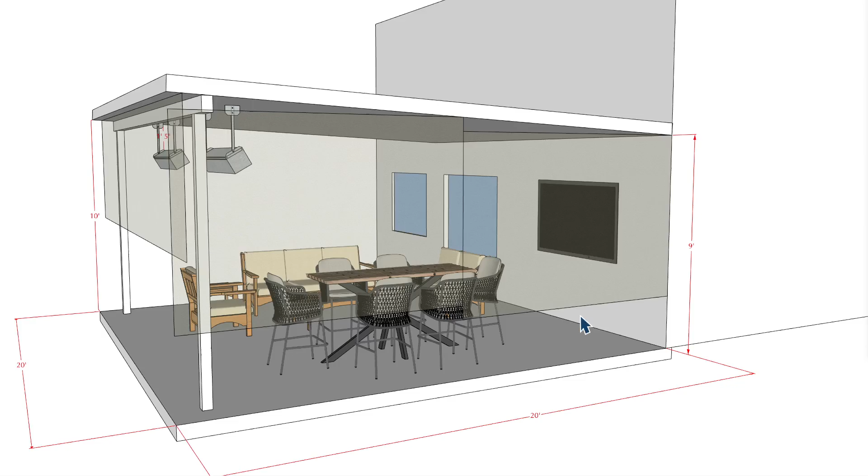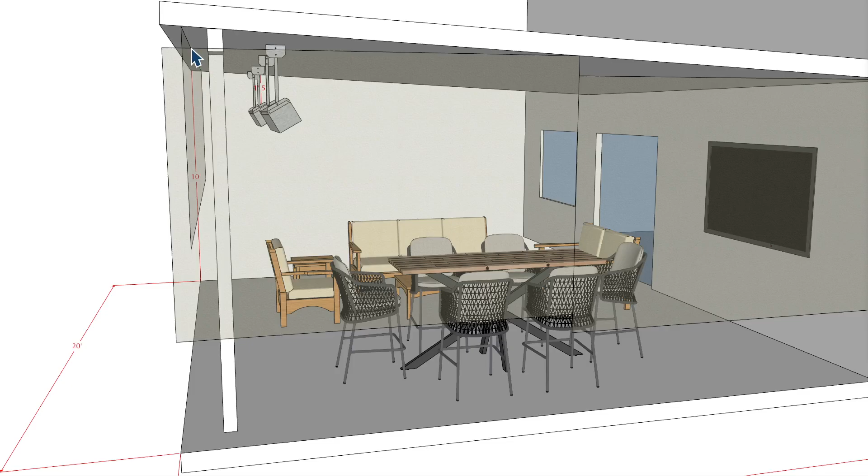This isn't going to be direct or specific, but it's going to be very close, I think, to what the information is that we received. I have this center beam here going across, about 12 inches in from this edge here to here, and I have a 4 inch by 4 inch beam or post holding that beam across.

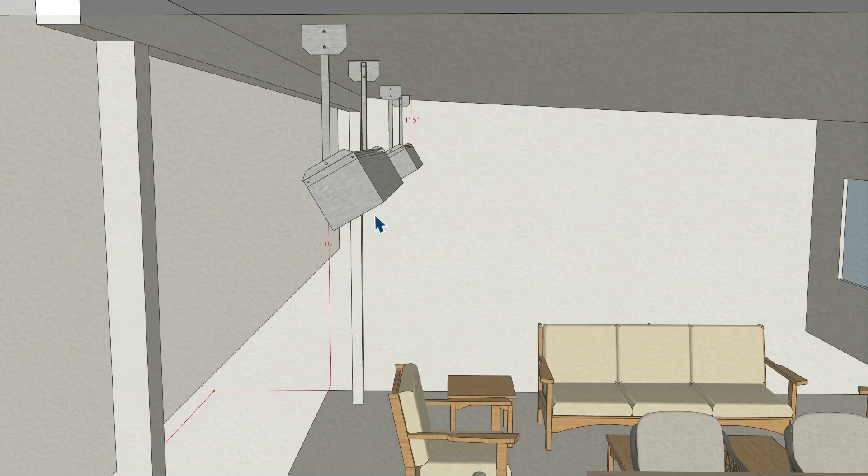Then I brought the heater in at 3 foot from this outer edge to, I think, the actual point right here, and I have it at 30 degrees. The heater, when at 30 degrees on a TSH, requires the angle to be no more than 30 degrees, as well as a clearance height of 17 inches here.

So that's one thing to be concerned about, or consider at least, when you make this decision on placement. I have a table and then some sofa and seating area like that, and I do have some shades here, drop down shades.

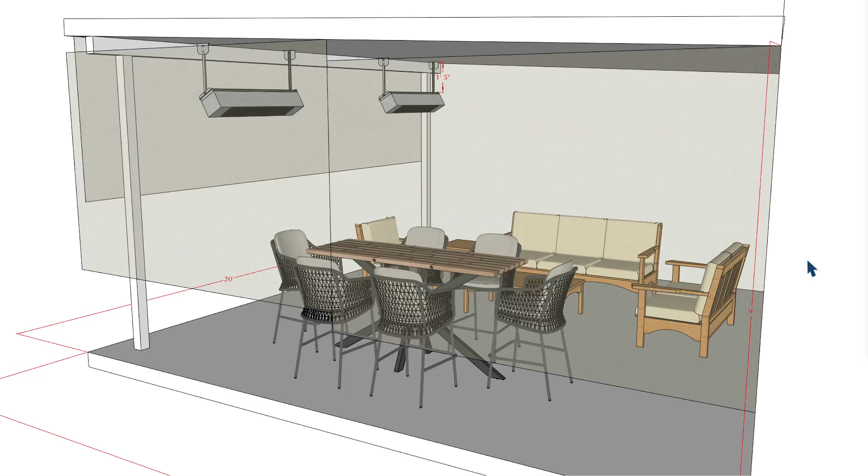Let's go ahead and look at the footprint of heat on these heaters. You can see that we're really going to cover this position here. The one position over here that I have, I'm not quite sure again of the true setup here, and then half of this sofa area here decently.

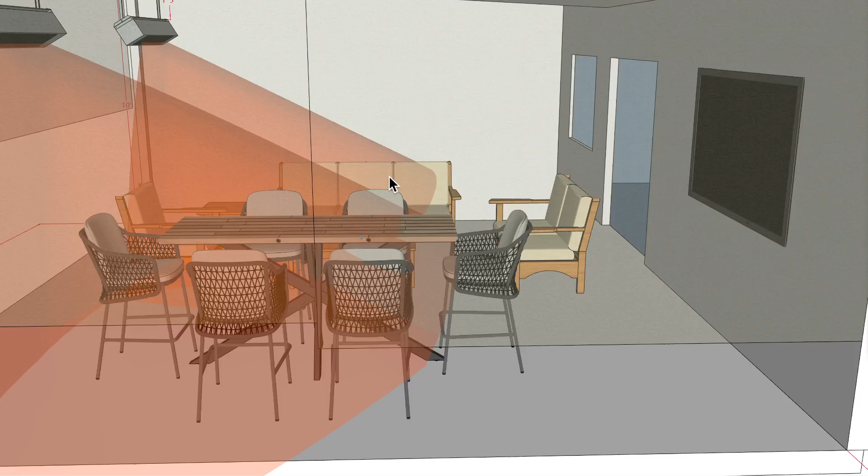And then you had mentioned something about the wife not liking the heater visually. I'm going to turn off the ray, because you don't visually see the ray, but this is how you would see the patio heaters out of the window, looking this direction here as well.

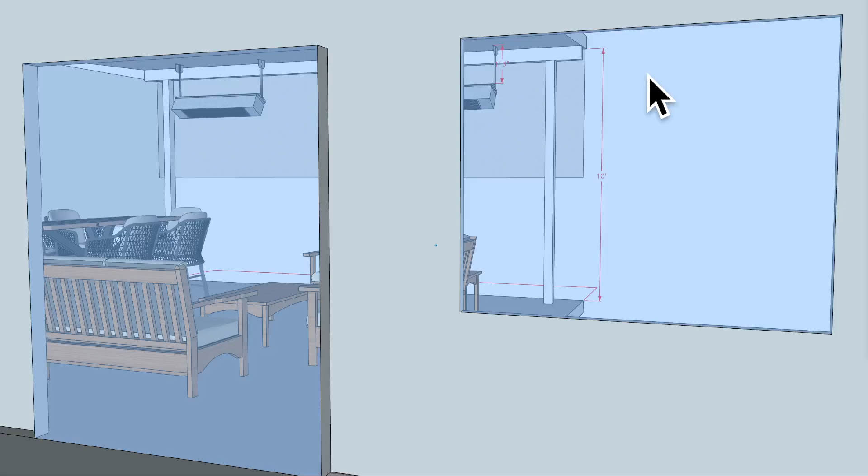See if I can go back in there. I'm not quite sure if this is where the window is going to be or the door, but I would imagine there's going to be a viewpoint, something like this is what you're going to see.

Yeah, I think that's about it. Would I do this application? No, I would do something like this here, really.

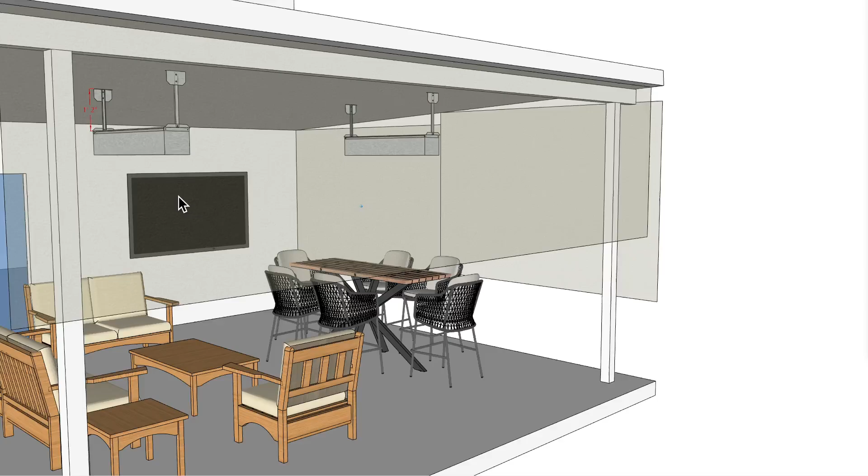Now this would put a better heat source on. And by the way, I have this at kind of like a bar height. It should really not be a bar height, unless it is. That's something to be concerned about.

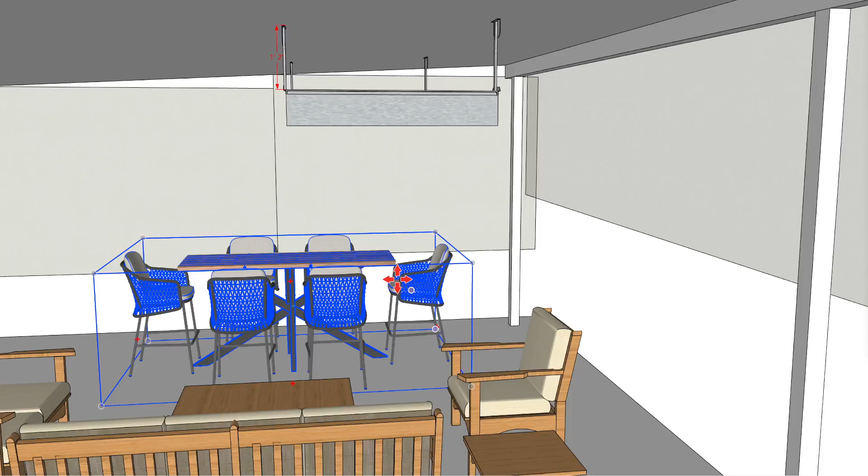Let's just move this down so it kind of has that same height as a normal seating position. So that would be more something like this here.

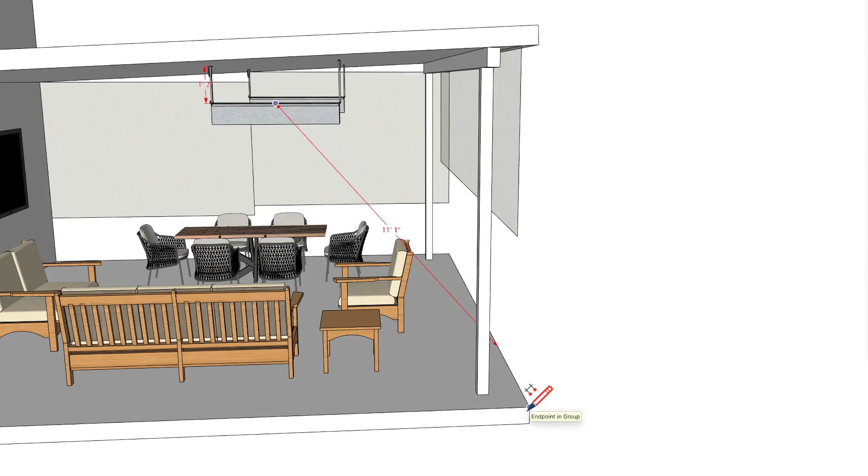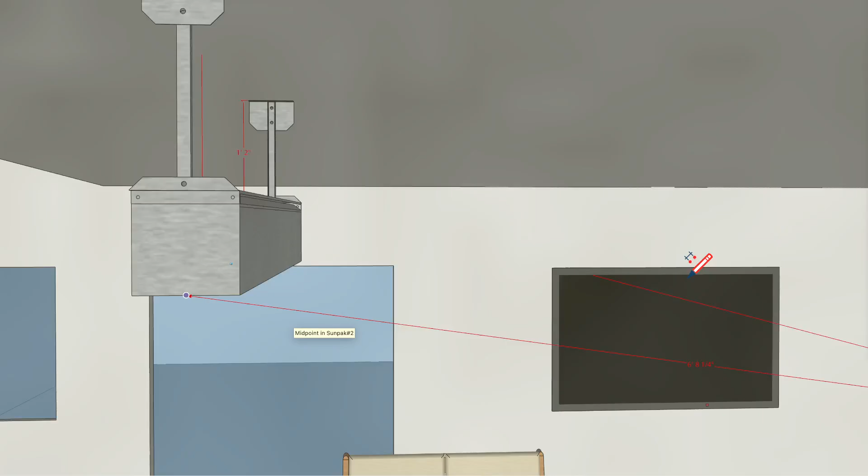But I have these heaters now moved in approximately, I think, 5 feet from this outer edge here. Okay, 7 feet 3 inches from the outer edge, and I have them at a distance apart from each other. That distance, from here to here, is 9 foot center to center.

Now let's go ahead and look at the footprint of heat on this. So now you can see that we're getting a little bit better coverage for this outer space here.

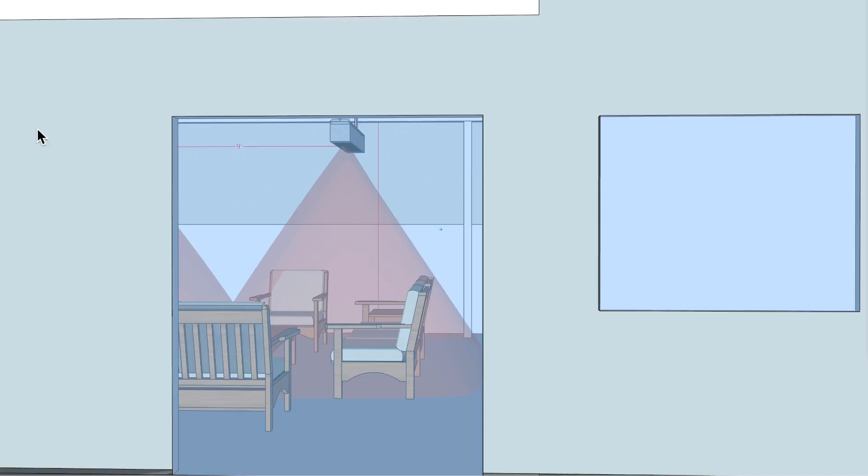And looking outside, do you see the same longer units as you did on the other? I don't think so—you're not going to see the ray again, like I said before. So this is a smaller visual from looking out into the patio versus this one over here, which is a little bit wider. This is 4 foot wide, and you see a little bit more detail on that.

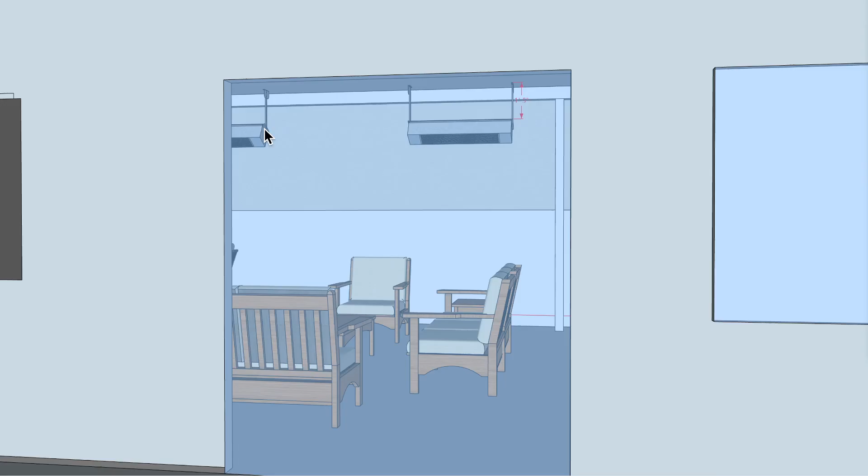But in any case, I like the footprint of heat better for this. And when you take the heater and mount it in this direction here, pointing it straight down to the ground, then the heater requires 14 inches of minimum clearance. So that's why I like this a little bit better.

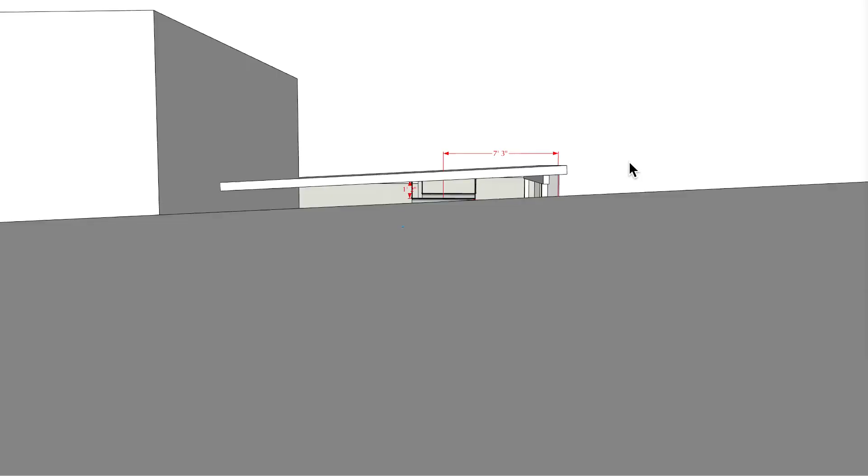Kind of seeing both of these now, and again, the footprint of heat, kind of getting an idea of what that would look like. And we probably should move this down here like I did the other one, so it looks semi together there. There we go.

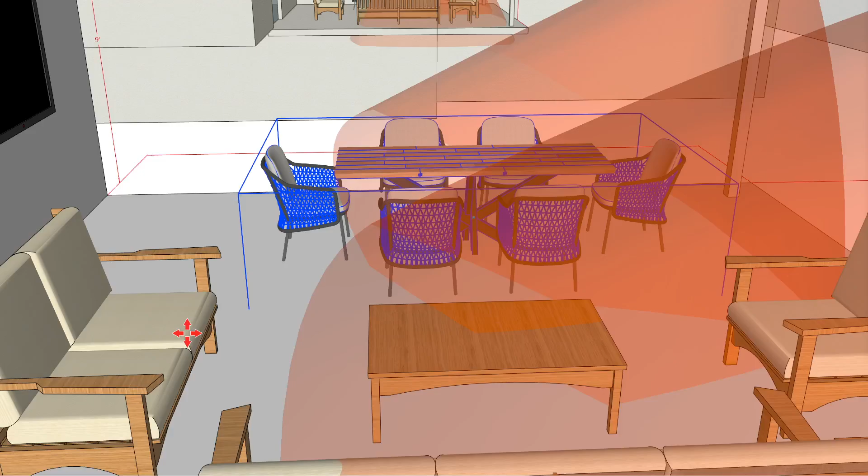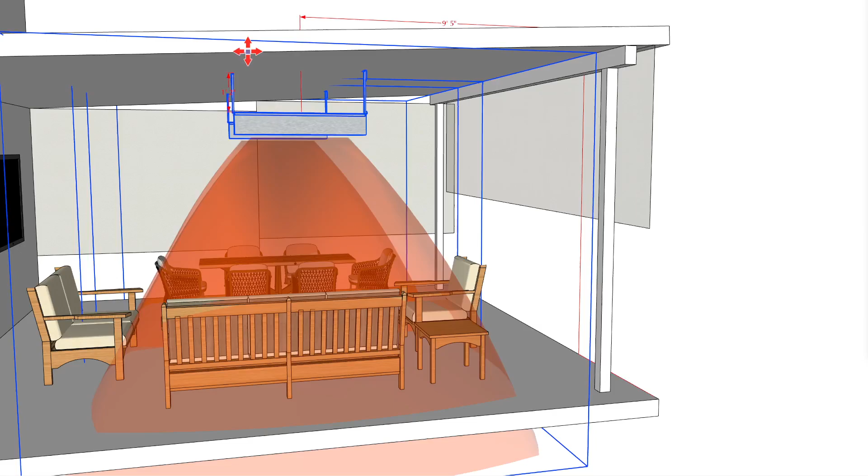But yeah, I like this setup a little bit better, for not only the footprint of heat, but the visual aspect. And honestly, you could even move this in if this is kind of like the seating position that you're dealing with. Let's go with the 10-foot.

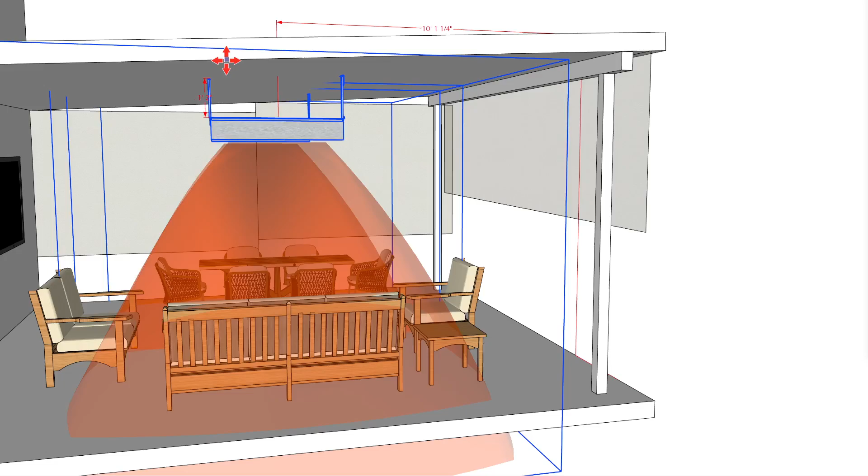Try that again, sorry. Yeah, I was going to move it into the 10-foot range. There we go, somewhere close to that area there. So center of the heater, 10 foot in, I think would look just a little bit better, personally.

This is the height that I have, 7-foot height of it on this door. And again, looking out, that's what you're going to see. I kind of like that better.

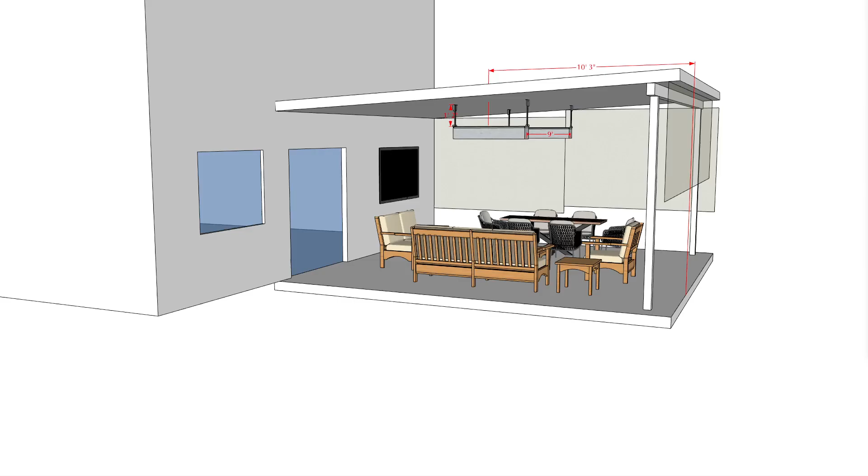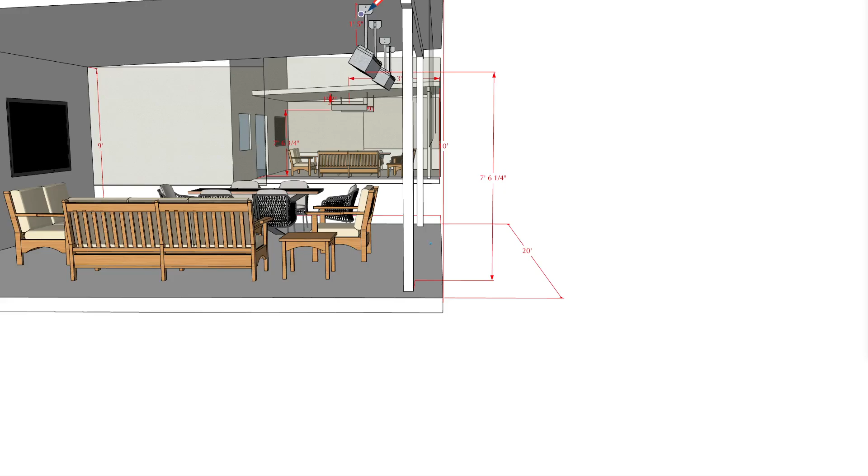Let's go ahead and see one last thing here, which is placing a height on here. So that's 7'6" off the floor here, and then this one here, the bottom of the heater, that is going to be 7'6" as well, but it's higher on this part of the slope ceiling, which is what I was told—that the slope comes from outer in downwards.